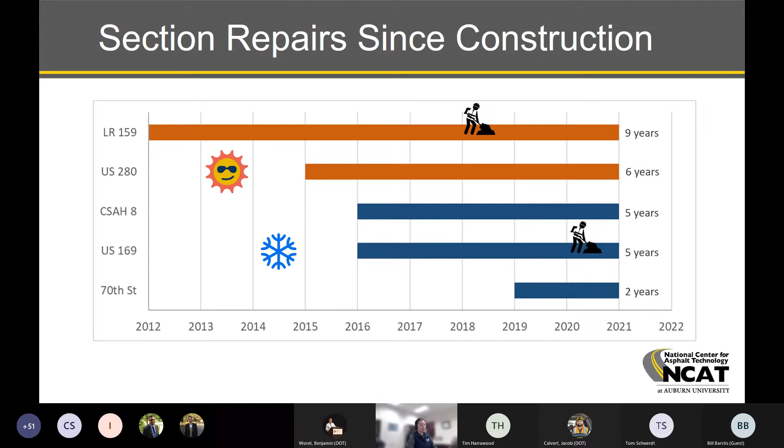And then last year we had to also do some work on some of the control sections in US 169. But other than that, we really haven't done anything. So that's important and speaks a lot as to how all of these treatments are performing, even for those that are 9 years old. Again, I feel like that's very significant.

Now, as far as where we are in terms of our performance indicators, I wanted to also show what percentage of sections are either in good, fair, or poor condition category. I kept the bars at the same length as the time that they've been in service, just to give you an idea, because maybe we'll see, for example, a lot of red in that top bar for LR 159, but it's also the longest bar, meaning that it's been in place for 9 years. So again, that gives us an idea of, okay, this is how the treatments are performing so far.

So one thing that I would like to point out here, for example, on LR 159, we still have that 4%, which I think is like one section that is in good condition category. And then roughly half of them are in fair condition category in terms of cracking, meaning 5 to 20% cracking. And we've had some that have gone over the threshold, more than 20% cracking. But again, 9 years. So this is the status right now. The US 280 sections, we do have some that have gone over 20% cracking, roughly 41% still in good condition, about half in fair condition category.

The CSAH 8 sections, again, it seems to be about the same story. The US 169, even though they have been in service for the same time as the CSAH 8 sections, we can see a lot more sections transitioning into that fair condition category, and then even some more with more cracking than 20%. We haven't had anything too significant for cracking for 70th Street, but those are the newer sections. Still, most of them in good condition category in terms of cracking.

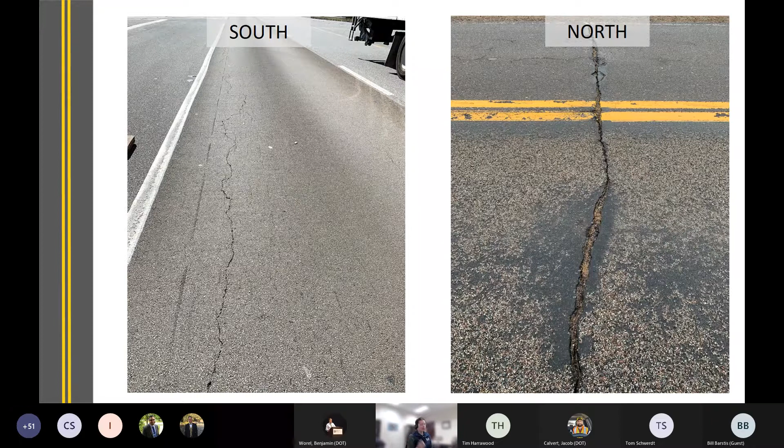Again, a lot of that cracking is a result of the existing condition of the pavement at the time of treatment. We can see there on the left, it didn't matter what type of treatment we had. We had either a cape seal or a chip seal. And if you can't see very well where the crack goes, I'll help you a little bit, but you can see it there along the wheel paths, no matter which treatment we had, it reflected back. Same thing, that's on US 280 in our southern sections.

And then for the northern sections, it's basically the same thing with the thermal cracks. And for example, in this case, we had the old shoulder that was kept in place, and we had a thermal crack or a transverse crack going there. And eventually that made its way also through the new thinlay. So again, there's cracking, but we need to look at the types of cracks and not just the amount of them.

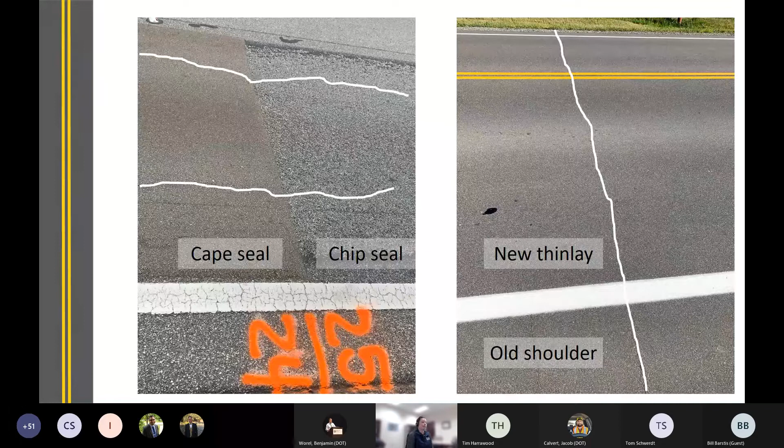For IRI, for the most part, I think we're doing well. It's not much of an issue for the southern sections. It's more of an issue for the northern climate. And we even have some sections in CSAH 8 where IRI has reached the poor condition threshold, more than 170 inches per mile, and a lot of them in the fair condition category. It's not the same case for the US 169. I think just the difference in the construction and the pavement structure that's there is making all the difference. And 70th Street, even though it's recent, we have about a quarter of them that are already transitioning to the fair condition category.

Why is that? Well, these are the types of cracks that we see. This was taken in CSAH 8, so you can see the difference in elevation, the effect that that could have in the IRI. So it's no surprise that we see those numbers where we see them. And what's important is to see that pavement preservation treatments can help mitigate some of what's happening there.

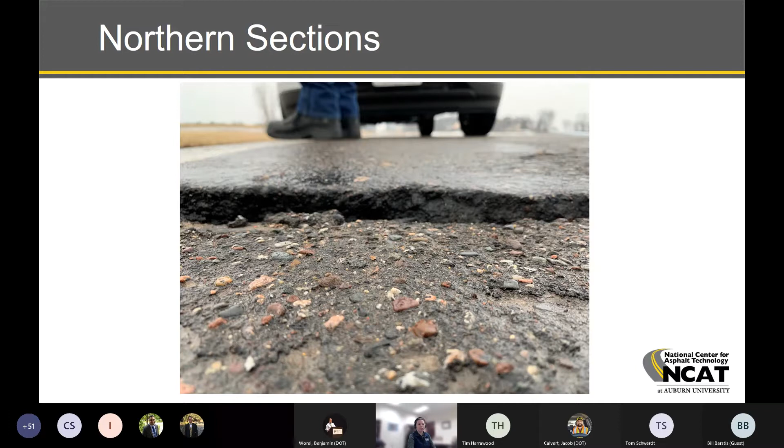Now, rutting is not really an issue for any of the sections. Some of them are just barely over the threshold for the fair condition category, so they may be 5, 6, 7 millimeters of rutting, but really not an issue for the most part, and that's not surprising, I think.

One thing that I wanted to talk about today is our efforts to put this data in a way that it's more accessible and easier for people to use. I showed a preview during the test track conference, something that we were working on to make it a little more interactive. The way it was set up is that you could go down the list and click on the different treatments, and then that takes you to a PDF file. You want to see another one, you got to get out and look at another one, and so on. So we tried to make it more user-friendly.

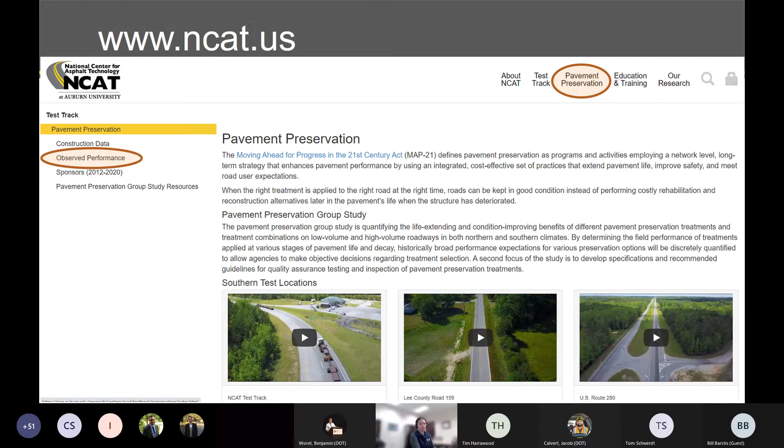But if you click on that, and before we go there, I need to make a really strong point here that these results are preliminary. They may be changing as we get the data, we are adjusting. So don't take this as being written in stone or anything like that. But moving on, you will find something like this. So it's basically a summary, same type of information that we had before, just easier to use.

Just to give you an idea, and I could have done this with the live page. This is live right now, but I wanted to go one by one. These boxes here at the top left are just filters that you can use. So you just choose the treatment that you want to look at, what kind of initial condition you want to look at, and then the time frame.

We've extended our analyses for cracking up to 10 years. So those curves that you see there for cracking, we fitted that using the data and extrapolated to 10 years just to have a nice round number. So you can choose those just to look at what you're really interested in. Otherwise, you just get the whole cloud of data.

These numbers here at the top, if you look at the time to poor, that's just the time that it took to get to the 20% threshold that will put you in the poor condition category. So in this case, this is the control curve. We can see there 4.5 years until we reach that threshold. And then the time to poor for the treatment, in this case, we didn't get there in the 10-year period, so it's not showing anything.

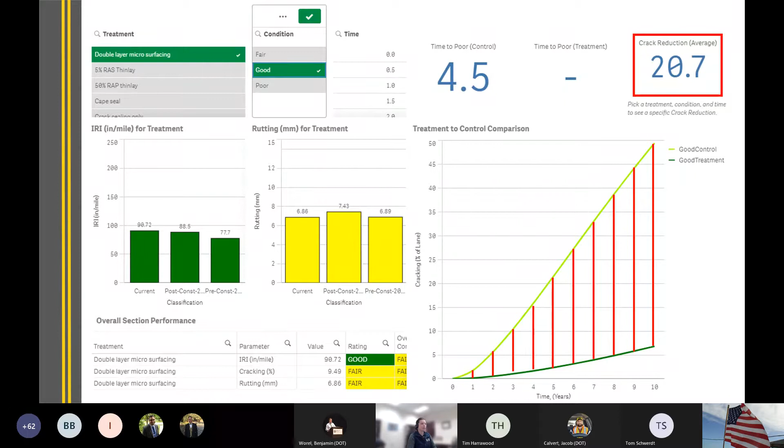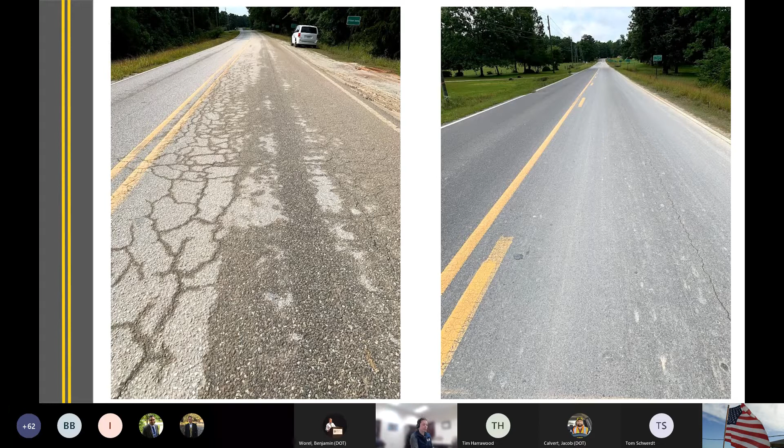And just an example here. So this is what you will see as far as the data. In this case, I selected a double layer microsurfacing that was in good condition to begin with. But this is really what that looks like in the field. So big difference, especially in cracking, which was reflected in those charts. This just gives you the picture of where we are right now, but it's nice to have the data to support all of that, not just the visual observations.

Another thing that I wanted to point out is that we have written several journal conference papers. We have a report there. So if you go to the Pavement Preservation Group Study Resources at the bottom of that menu on the left, this is where you'll find all of the published resources and links to those papers if you want to read them, visit them. There's the reference for them.

Now, another thing that I wanted to talk about was how preservation is affecting IRI. We have done a lot of discussion on crack performance, and we really can do the same thing with any other indicator. So we've done an analysis for IRI, again, because it's very relevant to the northern sections. And this is part of an upcoming TRB paper that will be going out for the next meeting.

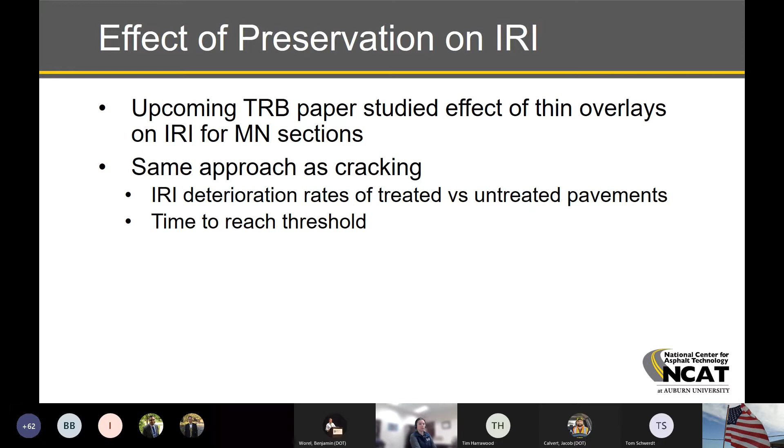So just wanted to show a preview here, but it's basically the same approach as what we have done for cracking. We've looked at the IRI deterioration rates of treated versus untreated pavements and compared that, the time that it takes for them to reach a certain threshold, and do basically the same type of comparison and analysis that we have done in the past for cracking for the treatments.

So how we did this, we basically took the control sections, first of all, looked at where those control sections were at the beginning of the study, and divided them by condition category and developed a curve for those sections so we could get the slope, basically deterioration rate, based on that pretreatment condition.

So this is an example here for the CSAH 8 sections. We had sections in good and fair condition category. We didn't have anything in poor condition category at the beginning of the study. And it doesn't change too much, but the slope is slightly higher for the sections that were in fair condition category prior to the beginning of the study.

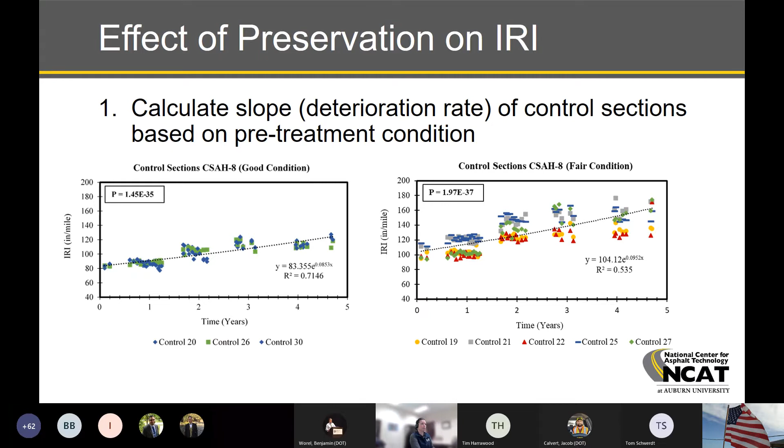Then we did the same thing for the treated section. So we took each of the treatments, in this case the thin overlays, and we calculated the slope. We fitted the curve. It's an exponential form. We calculated the slope for all of them. You can see there's a pretty decent fit for most of them. High R square, over 0.8 for most of them. There's only one that's about 0.6.

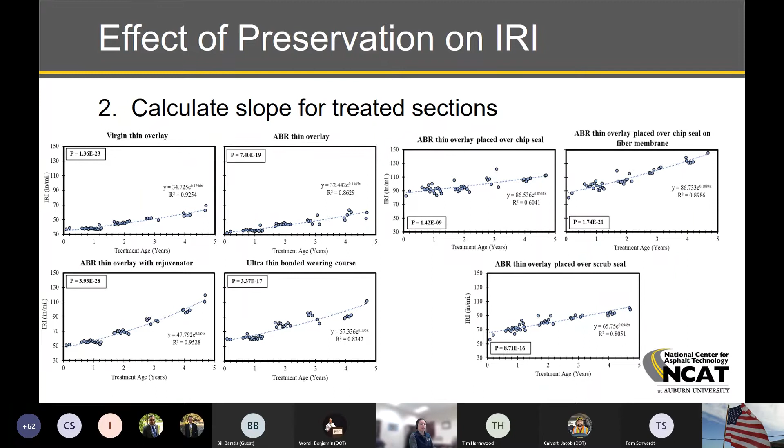But we took those, and now the next step is to compare the two. One thing that we had to do was shift the untreated curve. We know the slope is basically the same, but we had to change the starting point at time 0 so that it will match the pre-treatment IRI of the treated section. So in this case, for example, this section was treated with a virgin thin overlay. Before that, the IRI was around 86 or something like that. So that's where the untreated curve starts.

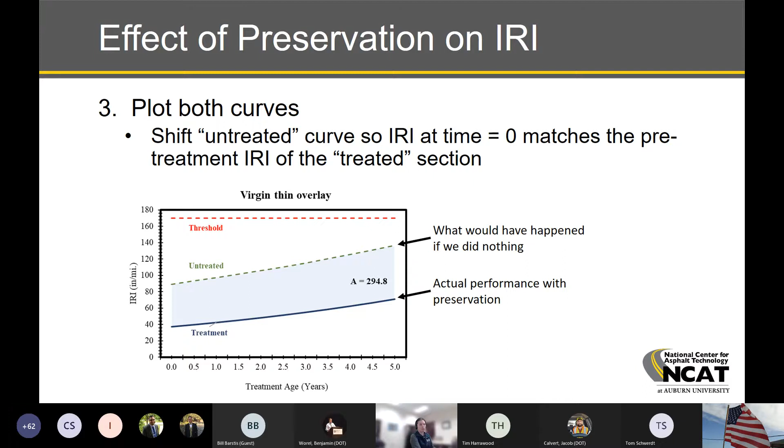And then we just plot both of them. So you can see there, the dashed green curve is what would have happened if we had done nothing. And then the bottom solid curve is the actual performance of that section with preservation. So definitely a big difference that it made. And this is in CSAH 8. So even though we had those aggressive thermal cracks, we've been able to keep a fairly decent performance by applying a pavement preservation treatment, which we wouldn't have if we hadn't done anything.

So the next step will be to estimate the time that it takes for those sections to reach the poor condition category, which in this case is 170 inches per mile. The life extending benefit is the difference between the 2 points for treated or untreated. And in this case, I'm showing here again, CSAH 8 sections.

We can see that on average for all the treatments that will fall under the thin overlay category, we're adding about 5.4 years of life extension in terms of IRI, and standard deviation 1.7. We can see in general we get a little more if we're doing a combination. So if we're placing the thin overlay on top of a chip seal, or a variation of a chip seal, could be the regular chip seal or fiber membrane or scrub seal, we tend to get a little bit more out of it. But in general, we're adding a good amount of time to these sections in terms of roughness.

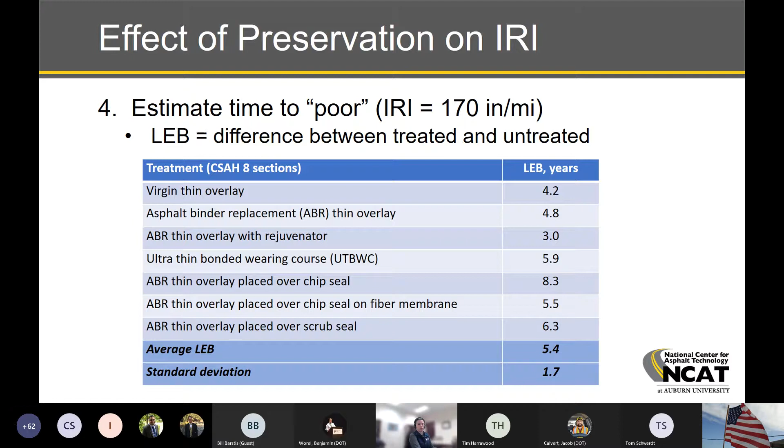So that's important. We see that consistently, and that can give us a better idea of how to plan for the future, how to put this in our pavement management system, and make better decisions as to what treatments to use. Now, getting to that poor threshold, we had to extrapolate far into the future. So right now we're at 5 years of service. For some of these sections, maybe that meant going all the way to year 10 or 11. So there's some uncertainty there. As we get more data, we can refine those numbers.

For US 169, for example, we couldn't get a good prediction, didn't feel confident predicting into the future. If you can see there that example of the virgin thin overlay on US 169, the treatment is almost a horizontal line. So it would just take too long to get to that threshold. But I don't expect that trend to hold forever. We'll probably keep getting more data and more deterioration, and at some point it will accelerate. So I feel like we need to be cautious also when we look at that.

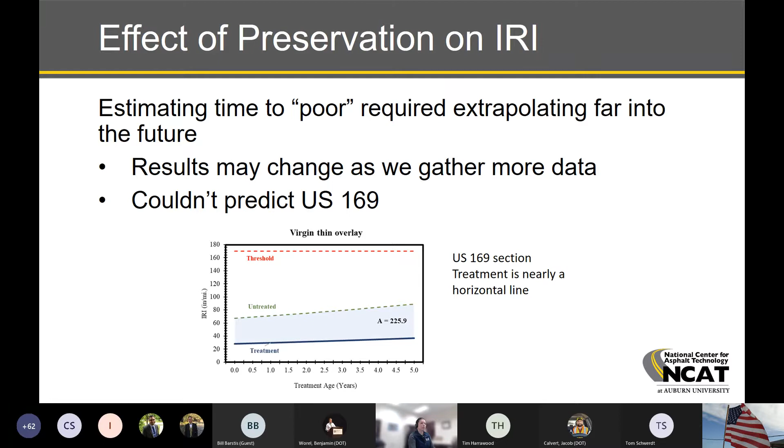But I think what's important here is to see the difference that it makes to have a treated pavement versus no preservation, and how effective it can be, and how much it can help us improve the condition of the pavement. It's also important to note, for example, the performance jump that will be the immediate improvement that we observed in terms of IRI. It was higher for sections that were rougher to begin with, and that makes sense because if they had higher IRI, that means there's more room for improvement by doing some treatment. If the section's already good, there's not much farther to go there. So that does make sense.

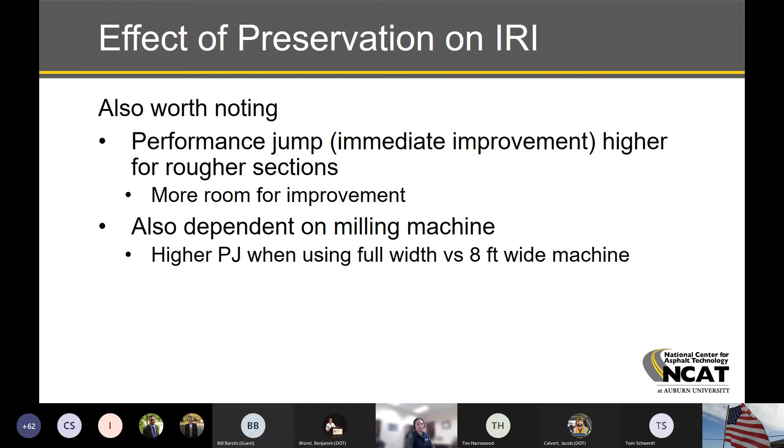And it was also dependent on the milling machine that we used. In the case of Minnesota, we had a full width milling machine and an 8-foot wide milling machine. So we were seeing that consistently better improvement when we used the full width machine. So something to note there. Also, we see that the life extending benefit is higher for sections with lower pretreatment IRI. So it's also the importance of how this plays into treatment selection and timing of when we do the treatments.

So there's more immediate improvement if you have a rougher pavement, but it may not give you as much life extending benefit. So you have to target the pavement just right so you get the better benefit out of it. This is again very rough right now, but it does give us a pretty decent idea where that trend is going. If your pavement is too rough, you do get some benefit. You do get some life extension, but it may not be as much as if you do your treatment a little earlier in the life when you're starting to see the deterioration, but you're not to the point where it's almost in that poor condition threshold.

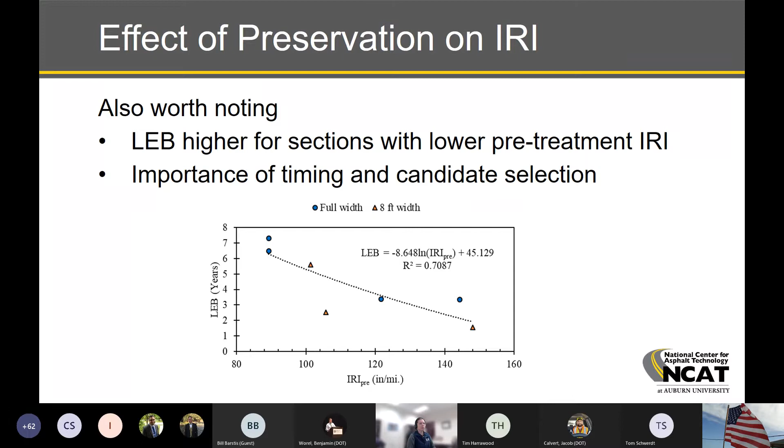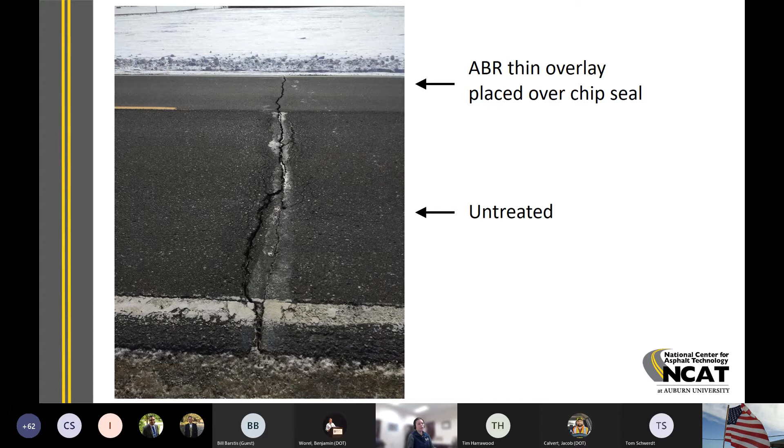The other section in the far side of the screen had a thin overlay placed over a chip seal. So we do see the thermal crack also. It's very hard to stop that, but the condition of that crack is definitely different from the do nothing scenario. So again, helps a lot and important to keep that in mind.

So to wrap up here, I feel like treatments continue to be effective. If our threshold is the poor condition categories, then we have a lot of sections that are still far from that target. So we have a lot to learn coming up. And then it's evident that we have benefits, and as we keep collecting the data and analyzing, it's becoming easier for us to quantify those benefits based on the relevant parameter, be it cracking or IRI or anything else that we would like to look at.

So this is where we are right now. We keep working, analyzing, collecting. That's basically our cycle. And I think that's all I have for now.

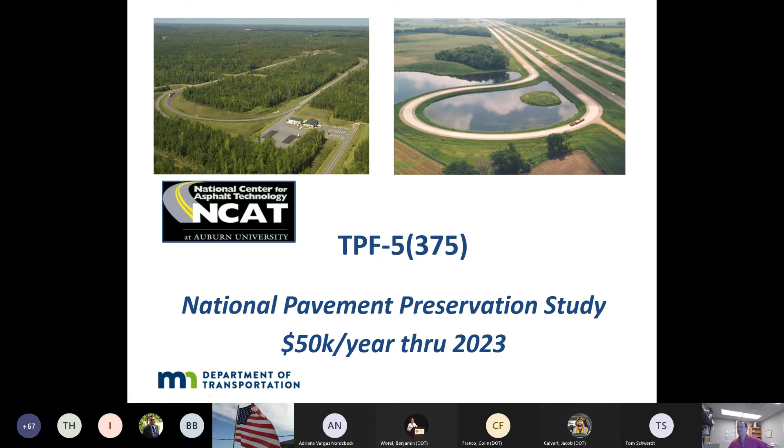So especially for the new members, this is a transportation pooled fund. There's our number. This costs $50,000 per year. And also to point out that we are the NCAT MnROAD partnership. The preservation work is really not on our test tracks, but off-site. So here in Minnesota, our office is down at Maplewood, Minnesota in the Twin Cities, MnROAD's about 45 minutes away, and our test section up in Pease, Minnesota is about 45 minutes up from MnROAD.

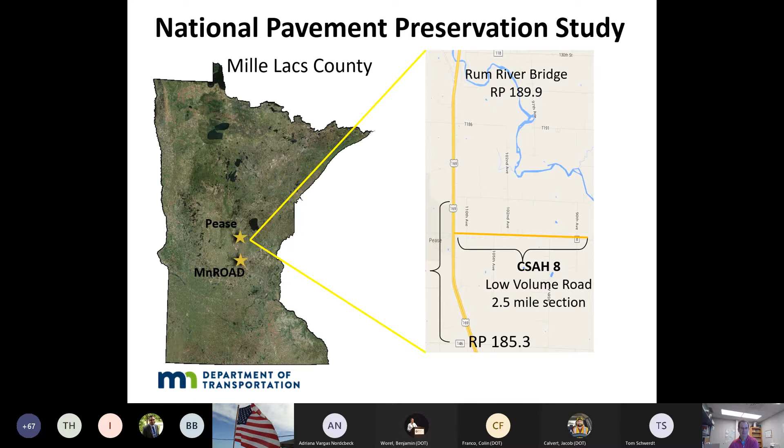Just a general layout here. This is US 169, which is our high volume route. CSAH 8 right there, so County State Aid Highway 8 is the low volume section, 2.5 miles long. So we were fortunate to get, I think, two different and interesting test sections in one spot. Not really to read because it's pretty small font, but more the general layout on 169. Our sections are in the northbound driving lane. Here, most of the surface treatments are at the start. We get into some controls, some fog seals, and then our thin overlays at the northern end of the section.

On the County State Aid 8 Highway, similar layout of the test sections. What worked out well here down at the east end is that wherever we did a thin lay, so we did these milling and thin lay surfaces, we really have a control across on the other side. So it was easy to observe the thermal cracking or reflective cracking performance there.

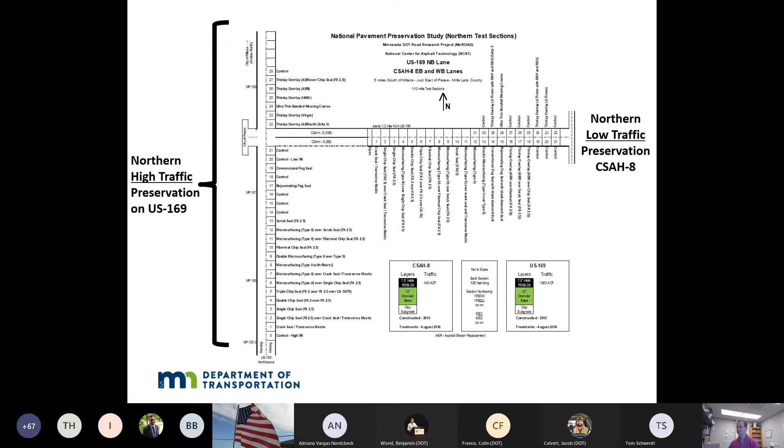So on the MnDOT pavement preservation website, we've got history and test section information. That's the north-south, and now the 70th Street Recycling Project, which is really turning out interesting. Got some field reviews. One of our staff here has done a lot of work on annual visual distress maps, so that information is available. I think we've got the link to the NCAT papers Adriana mentioned, and then our construction application data. So as you look at cells, if you want to know any application rate, that information is also posted online.

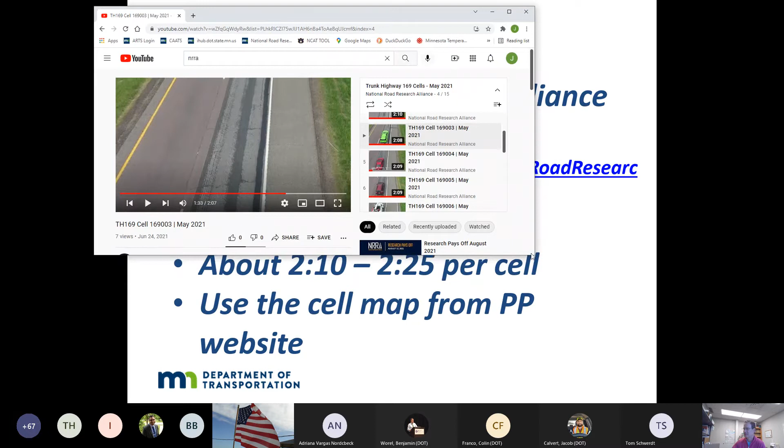The other thing we've recently done, and for the first time this spring, our aeronautics unit was out, and they did a flyby of all the cells. I'm going to show you a quick demo of that, but it is on the NRRA YouTube channel. Got a link here. They're going to do this once a year, so they took these pictures we're going to look at in May of this year. Each cell's about two minutes, just a little over 2 minutes, and you can use the map I showed you just a few slides earlier. It will tell you what the different sections are. I think in the future we'll get these labeled with a little more detail in our first run through here.

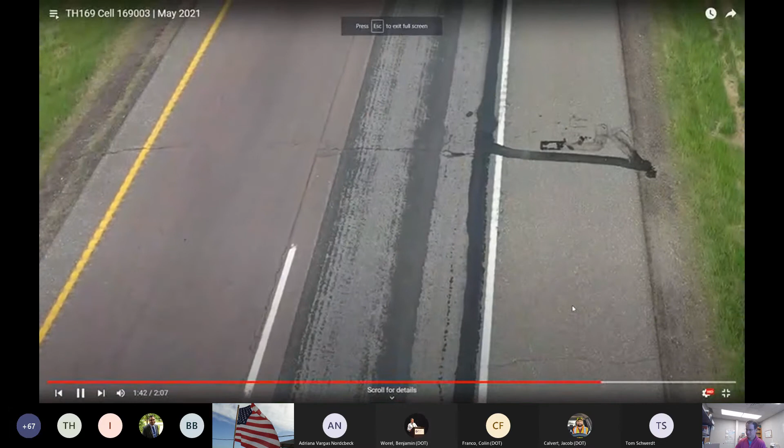Now we're on to the double chip seal. You can see we've had a lot less snowplow damage, especially in between the wheel paths. In the wheel paths, you do see a little, I don't think I'd call it bleeding or flushing, but it's a little richer in there. It hasn't impacted our friction numbers yet. You can see how we've got some of the bigger thermal cracks here that come off the shoulder into our lane there.

So this is the double chip seal, and these are available for every cell that we've had on here. I think if you start this at the first cell, you can continue to go through the first 15, but then you'd have to search and look at all the other cells. So that's one of the newer features we have going, and I think it's really good to have that visual of what the performance looks like.

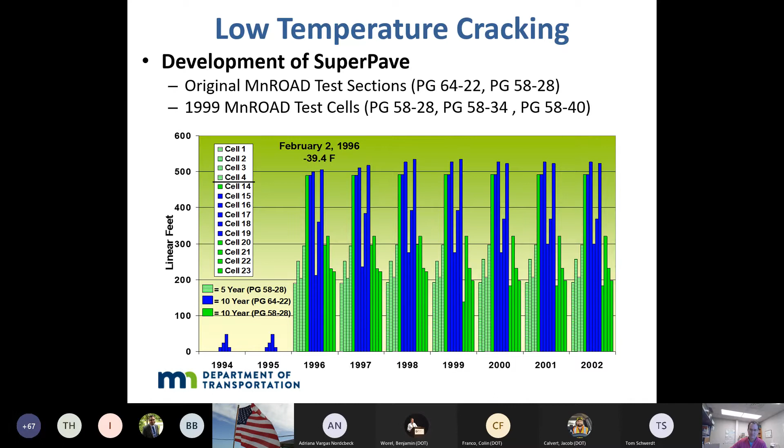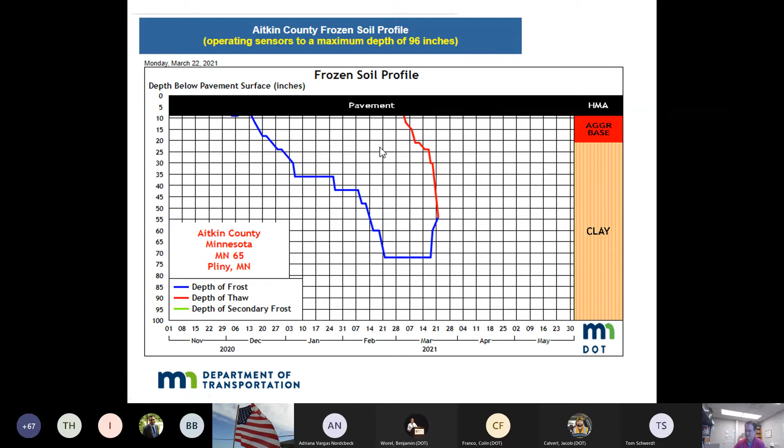It's still very cold on the surface, but we've got this thawing going on underneath, and until we completely thaw out and the water can drain out of the system, this pavement's really in its probably weakest state for at least two weeks of the year. And then also we've got some clay underneath here, which we know doesn't drain very well. So winter is really tough on these pavements.

And then to get into some of the study and the benefits here, what I enjoy about working on this project for the last really 5 years, since our partnership and construction in 2016 of our northern sections, is to improve and or extend the pavement life and really do it in a cost-effective manner. We're really getting some great data, after 9 years in the south and 5 years in the northern area, on this improvement and life extension.

Cost effectiveness is going to be a little more dependent on every agency's different costs, and then to kind of compare those costs against different treatments and determine what can be cost effective for your agency.

Pre-treatment condition on 169. There weren't as many thermal cracks. We saw a couple in the video flyover. This pavement had more little block cracking. You can see it in here. There's kind of a thermal crack, but not very well defined. A core taken out a couple feet away from that crack came out in pretty good condition. So we had some good pavement structure there.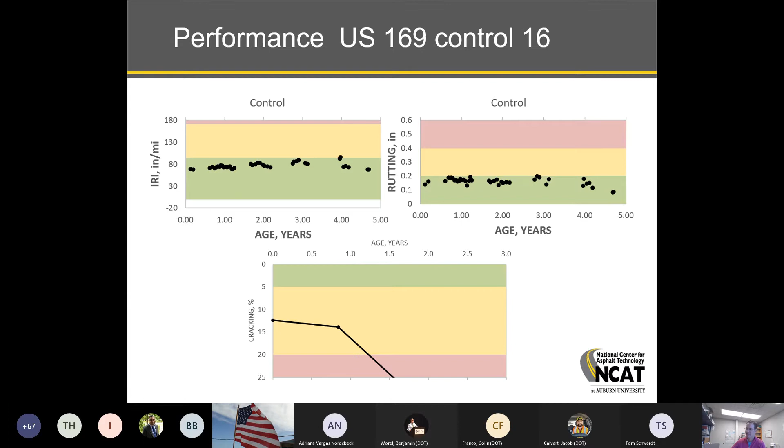Rutting really was never a problem, but what you can see is that the percent cracking was really going up. So percent cracking was really controlling what the district operations people saw in determining that it's really time to treat this pavement, and that's why we put the microsurfacing on it.

So now to get into a summary of some of the treatments. So microsurfacing on 169, you can see when we started, all the sections were in the 70 to 80 inches. After a good treatment, we improved the ride, and here is every winter. From fall to winter, we always go up in roughness. It's bouncing around a lot there, but from spring to fall, pavements kind of settle down, and we're typically getting smoother.

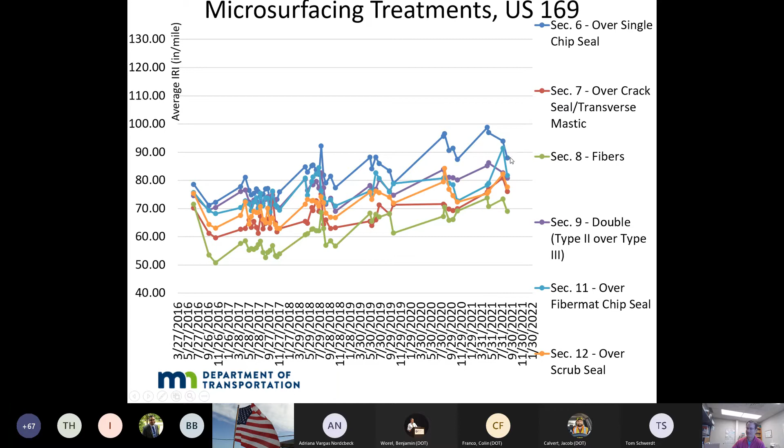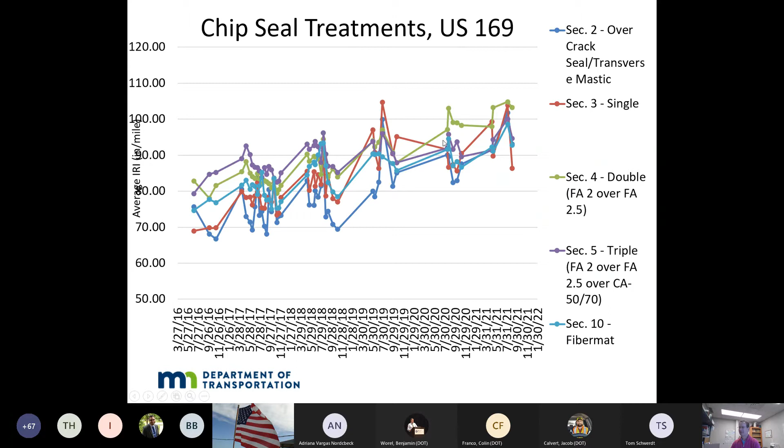So now we're in the about 70 to high 80s here, so not a big increase in ride on these sections. Chip seals, not all of them had initial improvement in ride. My experience with chip seals is not big ride improvements. It's always going to depend on the pavement, but here the life extending benefit can be the big improvement, the big cost effectiveness. Rides from 70 to mid 80s, now mid 80s to 105. So really the first chip seals moving into the fair condition. And once again, getting much rougher during the winter and smoother from spring to fall.

Finally, Adriana mentioned the two different milling machines. So on 169, where we did 6 treatments, they were done with the full width milling machine. We got outstanding initial ride. Numbers of 30 inches per mile are just fantastic. Really anything under 60 is very good. So these pavements were in

very good, good condition. And I'd even say most DOTs are probably not looking to do a thin mill and fill at this IRI number, but you can see we got outstanding results. And even today, 5 years later, we're still in the 40s and one still in the 30s. That's just fantastic performance, which then turns into cost-effective life extension.

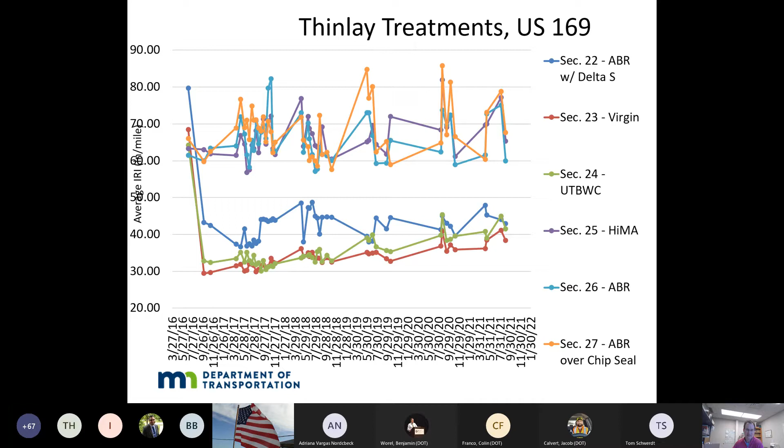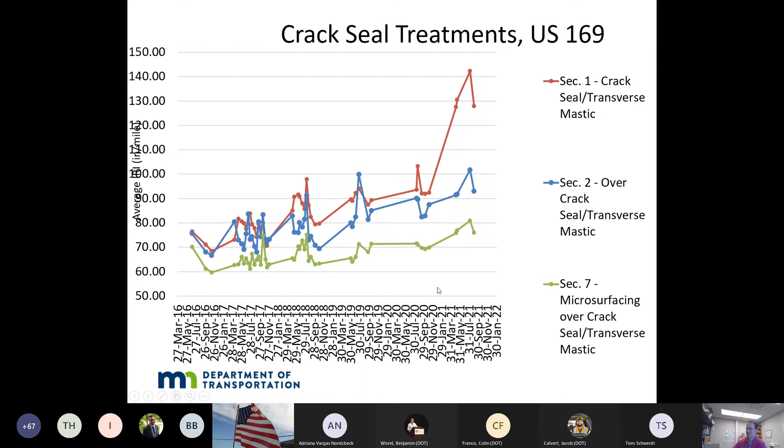Crack seal treatments, 169. I think our first section here had quite a big jump in roughness. Everything did improve, but there's our crack seal numbers. And some of these were covered with, let's see, I think two, we have crack seal under the chip seal here. And here's microsurfacing on top of the crack sealing, which is the smoothest of these three crack treated sections.

And for the pre-treatment condition on the county road, not the kind of squirrely cracking we had on US 169, but every section, 1/10 of a mile here, had 5 to 7, I'd call them classic thermal cracks, where the pavement was cracked across the lane. And that was really the challenge with treating these sections, is maintaining the thermal cracks. Microsurfacing, on some of them, especially the rougher ones, can tend to flow into those thermal cracks a little better.

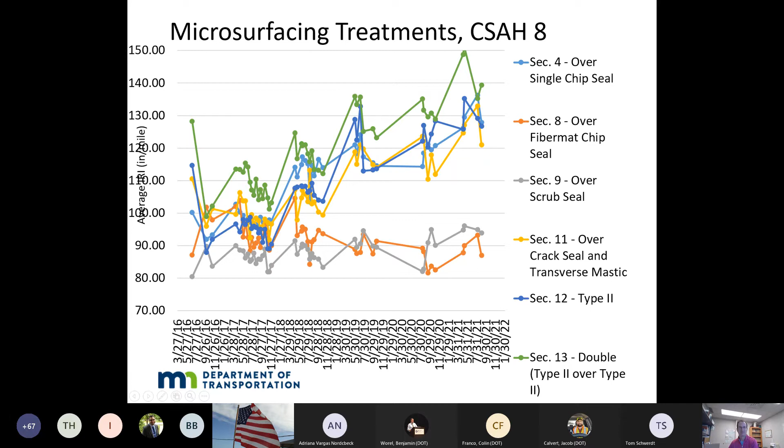You can see the double micro, the green line, made a really nice improvement. So two passes filling in those transverse thermal cracks, and then just continuing to get a little rougher. We've still got a couple that haven't changed much. But once again, every pavement, every surface is a little different, so performance always varies and depends on the individual section.

Chip seal sections, similar story, getting rough in the winter, smoother in the summer. We've gone from really one fairly rough section, which is about back to its precondition IRI values, to now all of the chip seal treatments are in the fair IRI condition over here.

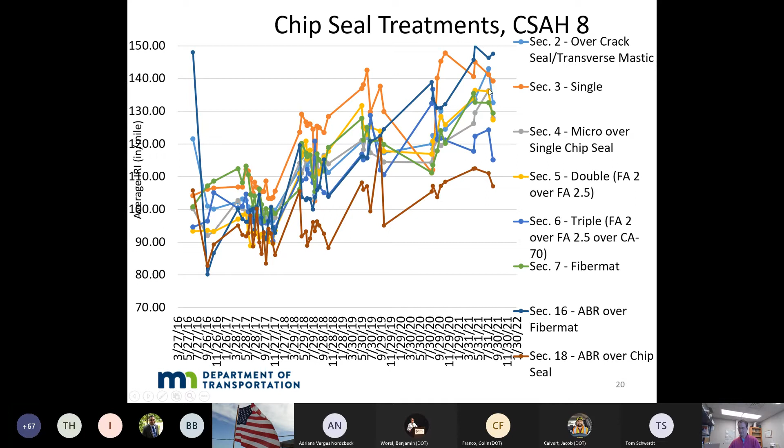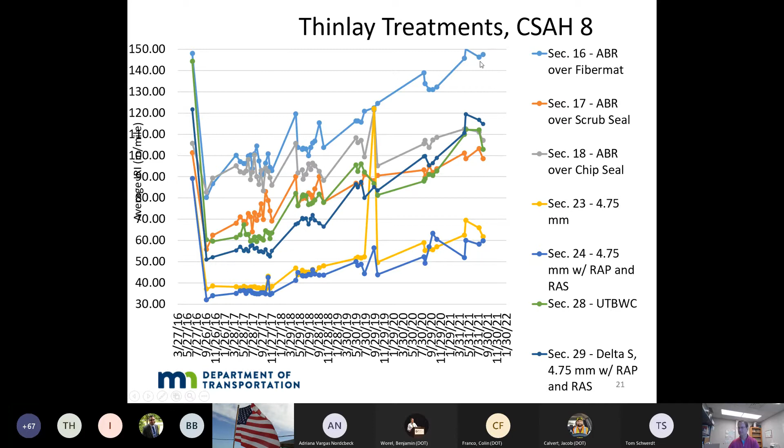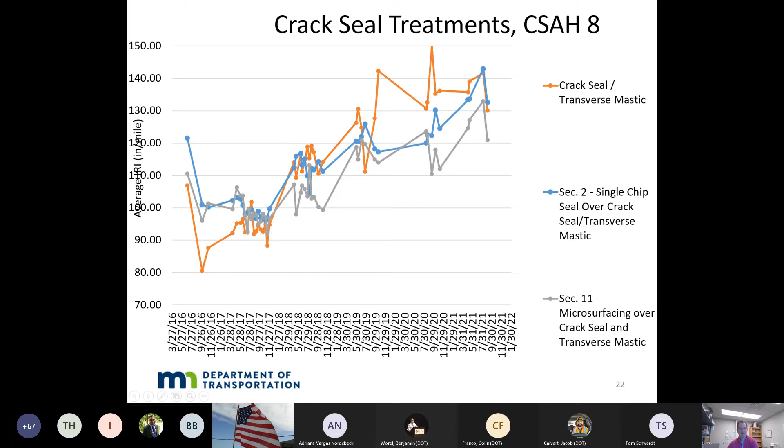Here's a couple of the recent pictures. So single chip seal shot at 0.34 gallon per square yard. This single chip had the most snowplow damage. You can see that we scraped the chip seal kind of off that longitudinal shoulder joint. Because we had a rumble stripe here, where you grind the rumble strip and then paint it to become a rumble stripe, I think as part of that, they moved the shoulder travel lane joint inside into the travel lane, and we get that deterioration there.

So the district maintenance forces did the maintenance on that, which shouldn't be impacting our ride IRI numbers because we'd be over here in the wheel path. But you can see that the chip seal with fiber mat, we did shoot it a little heavier, so we have two variables. We have a higher shot rate of emulsion and the fibers in there, and we certainly maintained the condition of that chip seal much better than the single.

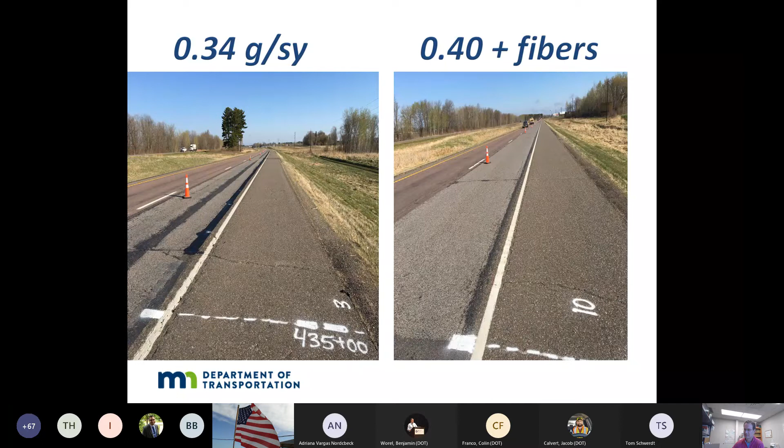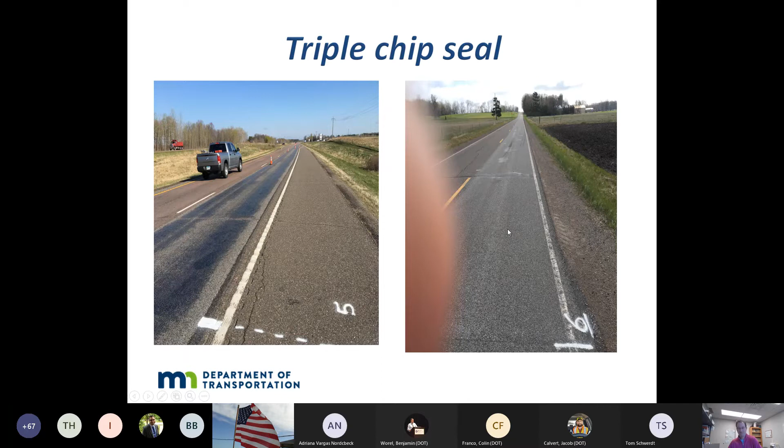Here's the triple chip seal, both low volume and high volume. I think from a pavement protection standpoint, we have about a gallon per square yard of emulsion down on these. The triple chip on the high volume got a little more flushing, bleeding going on. The triple chip on the low volume, except for the thermal crack problems, which are once again really tough to treat, I think that triple chip seal on the low volume pavement is going to last a very long time.

Another observation, the Cape seal seems to be very tough. We've only done a couple on the Minnesota state highway. I can think of, we've got some test sections out there. But sometimes our chip seals seem to get a little plow damage, and I've seen microsurfacing wear down to the underlying pavement surface, the hot mix that was there.

But when you do a Cape and combine the chip seal followed by the microsurfacing, you really get a tough surface. If you tend to wear off the microsurfacing, when it gets to the top of the chip, the wearing stops and you get a long lasting surface treatment.

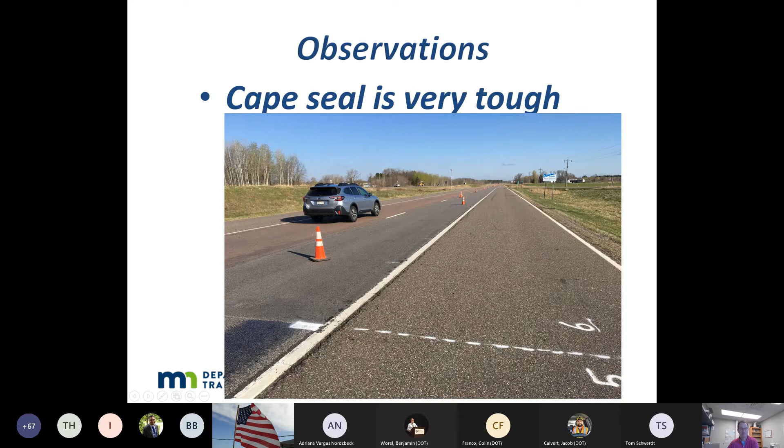And from the early findings down at NCAT and things that we're seeing now, any crack fill prior to surface treatment, I think, is going to certainly provide longer life extending benefits and better performance on those pavements. Our control sections are really starting to fail now, a little more than any of the treated sections.

Roughness, I mentioned a few times, increasing from fall to spring and improving spring to fall. And for the county system, it's really those well-defined transverse thermal cracks, which I think are going to impact performance and ride. And on our US highway, some surface cracking issue.

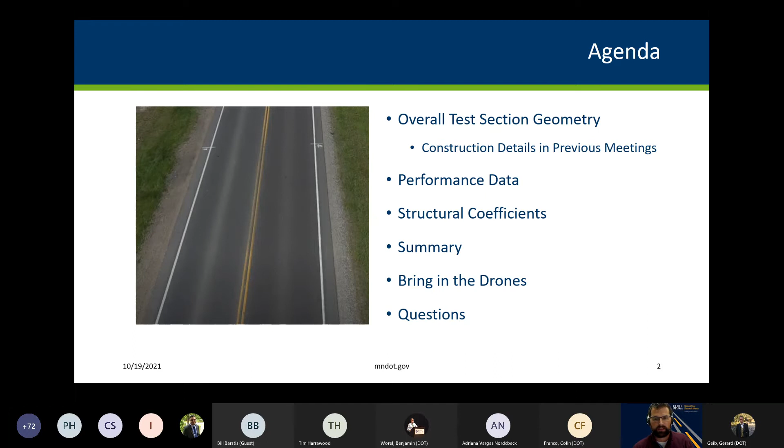I will mention the structural coefficient work that Adriana and Tauhid are calculating at NCAT. I'll give an overall summary of what I've presented and follow with a teaser for the MnDOT aeronautics work at MnROAD, which it looks like Jerry has beaten me to the punch on. But we'll continue to cover that again, and time will be left at the end to answer any questions that you might have.

As well as being a collaboration between MnROAD and NCAT, these sections are also a collaboration between MnROAD and the cities of Otsego and Albertville. The north half, westbound 70th Street, is owned by Otsego, while the south side, the eastbound lane, belongs to Albertville. There's Otsego's water tower and the Albertville malls for context.

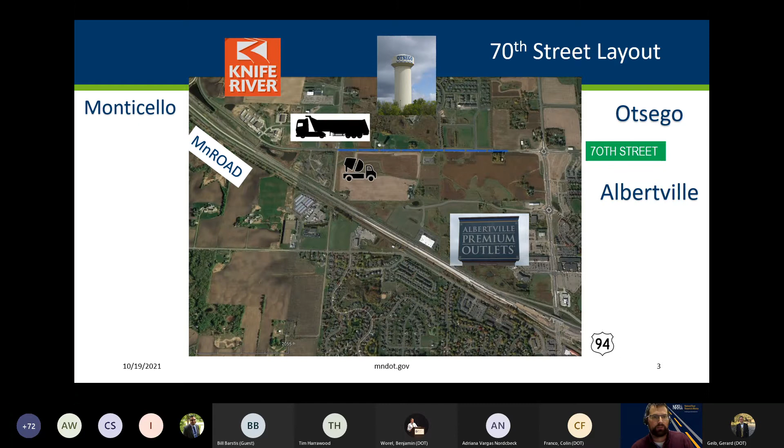Commercial traffic consisted mostly of deliveries to the local Knife River plant, as well as the Trudell Trailers, which is located right next to the concrete plant. And the majority of the residential traffic came from the developments on the northeast side. 70th Street also serves as a side road to connect Albertville and the nearby city of Monticello. Most of the visitors to MnROAD will have traveled across 70th Street and may remember its previous condition. I've been told it's hard to forget.

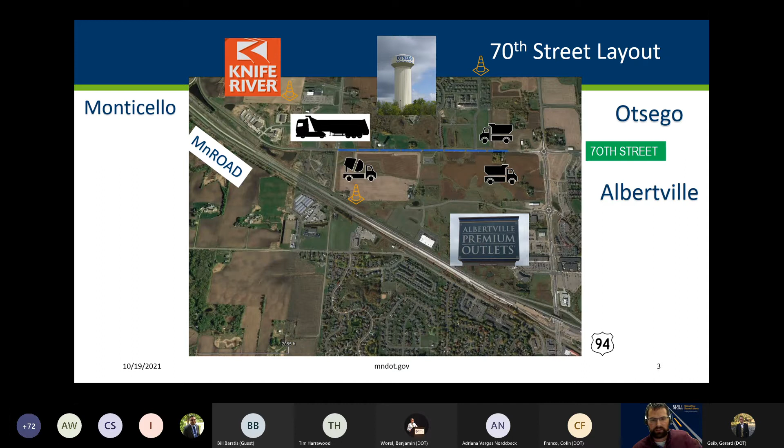There we go. And one thing we did not anticipate through the last couple of years is the amount of construction traffic that would increase with the expansion of the housing development to the north, the addition of a Michaels facility next to Knife River, and the beginning of another large project to the south of 70th Street that we're not certain what that will be yet.

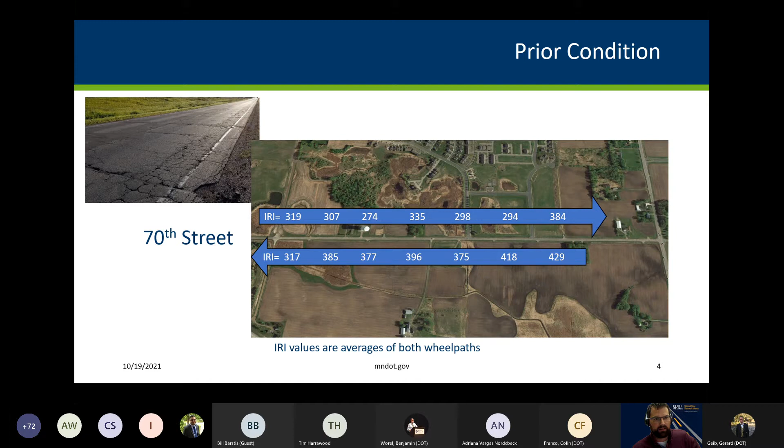70th Street was due for repairs with deteriorating road surfaces and low ride quality. Michael Vrtis likes to joke about how the cracks could be seen from space, and the ride quality was so poor, he was afraid our inspection van would fall apart when we had to run high-speed data collections. These factors, along with its scheduled replacement within the next 5 years, made it an excellent candidate for inclusion in the road preservation study. And here I've highlighted some of the IRI numbers pre-treatment.

And you may have noticed from that how the condition of the south side of the road varied from the north side. Albertville had only a few residents on the south side and had a lower concern about the condition of the road than the more populated north side. This can be seen in the visual distress of the roadway and is reflected in the measured roughness index. You can see where more treatments had been applied to the north side and the south side had kind of been left to do its own thing. It was therefore determined that the deeper treatments should be placed on the south side eastbound lane to get the most benefit.

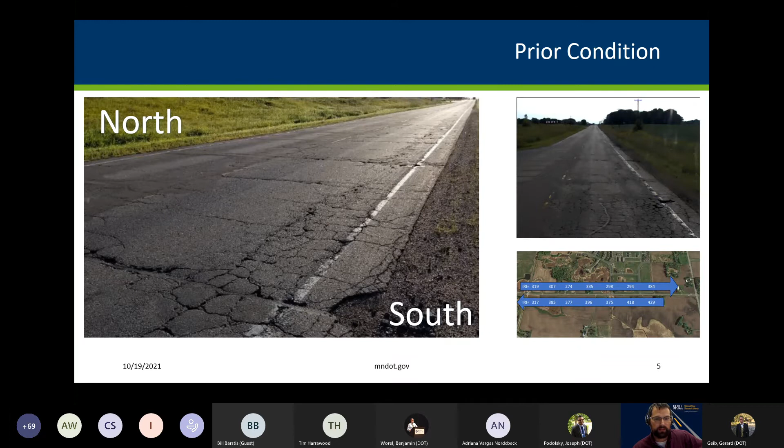So this portion of the pavement preservation recycling study consisted of 500-foot treatment sections that were constructed on the same road. We're going ahead, sorry about that. 50-foot transition sections were added between cells and room was left for lead-in length for the inspection van.

The main treatments consisted of a 1-inch thin lay over 7 inches of full depth reclamation, where stabilization was performed by foam and emulsion methods; 1-inch thin lay over 3-inch cold in-place recycling, again using both foam and emulsion; 1-inch thin lay over 3 inches of cold central plant recycling, again using both foam and emulsion. The control for these sections consisted of 1-inch thin lay over the existing pavement, with further controls being added with a 1-inch thin lay over a deeper 2-inch and 3-inch mill and overlay.

Sorry, my slides are getting ahead of me. Buzz and Adriana from NCAT led construction efforts with a crew from East Alabama Paving traveling from Alabama, and the Wirtgen demo team providing a CCPR plant and recycling equipment.

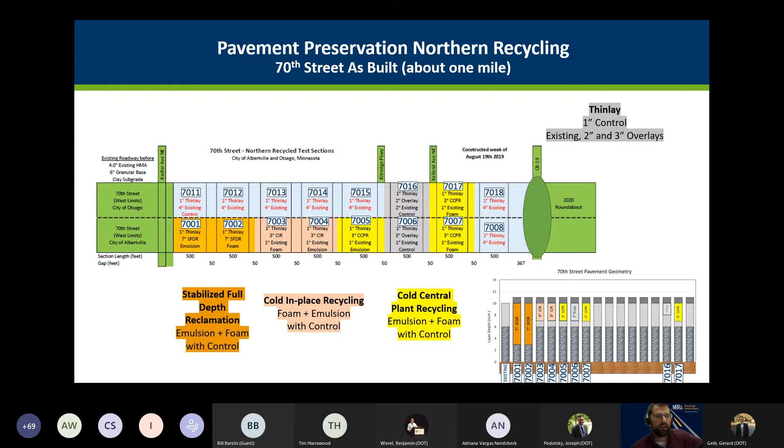And here we can see the different treatment depths compared to the existing roadway on the left side of the graph. The existing roadway consisted of 4 inches of HMA over a 6-inch granular base over a clay subgrade. To this, we had 2 deeper treatments of the 7-inch stabilized full depth reclamation, and then our 3-inch treatments of CIR, CCPR, and overlay. Westbound received one 3-inch CCPR treatment and a 2-inch overlay. All of the sections received the same 1-inch thin lay of high quality asphalt designed by NCAT.

This thin lay control is not the normal treatment for roadways in this condition, but it was decided to be used as the minimum treatment to get these sections through the next couple of years. So it was planned for short term. We said this is the shortest we can kind of get it through with the least amount of effort.

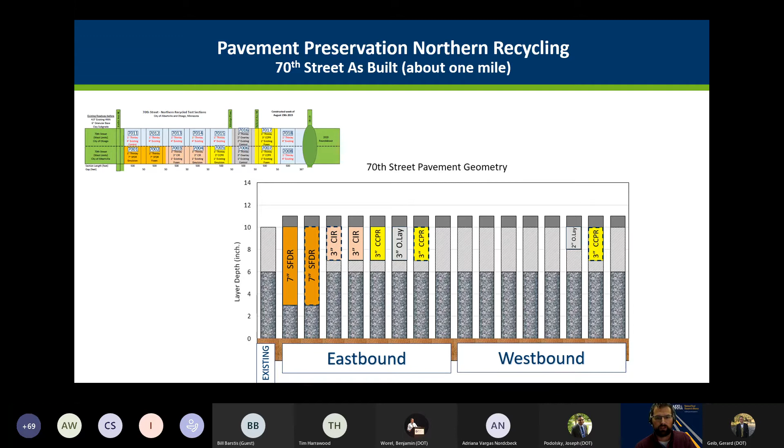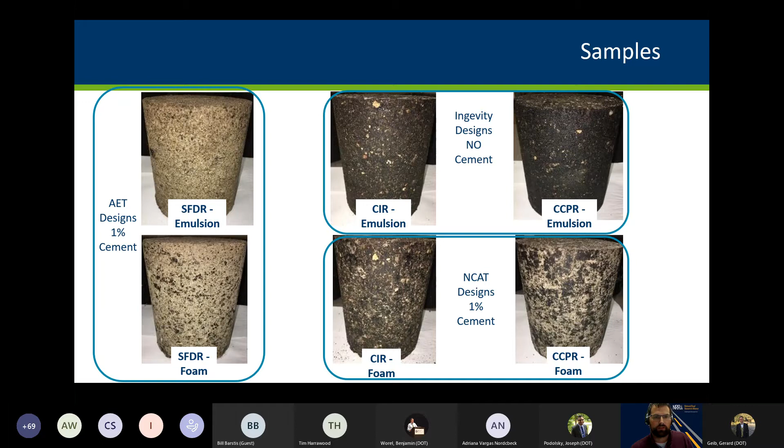And during construction, material was sampled during placement, and Ben Bauer was able to create cores in NCAT's on-site trailer. These photos show cores from the different treatments and are displayed here to show the visual differences in the mixes and to note the different designs that were provided. Actual mix designs are discussed in previous presentations. And I've included this slide mainly because Michael really likes it, and I hope you agree. I think it's fun to see all of the material differences. But if you do have questions, Michael and Adriana are available afterwards for any mix design questions.

All right, over the last year, manual distress surveys have been performed in October, January, and August. Cracking lengths were collected manually at these times. And as discussed previously, reflective cracking appears to be the main form of distress. What's new this year is that transverse cracks have now appeared in all sections, with the control sections still showing the most cracking. Rutting still appears to be low, and so has only been measured by our high-speed automated pavement distress inspection van. And as Adriana mentioned in the previous presentation, no repairs were required this year.

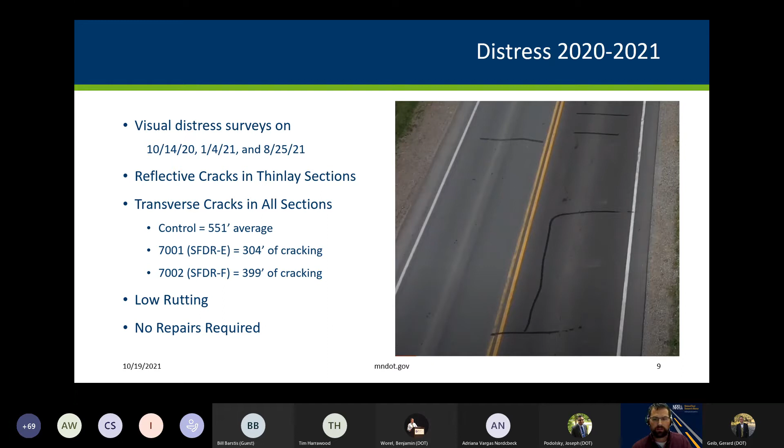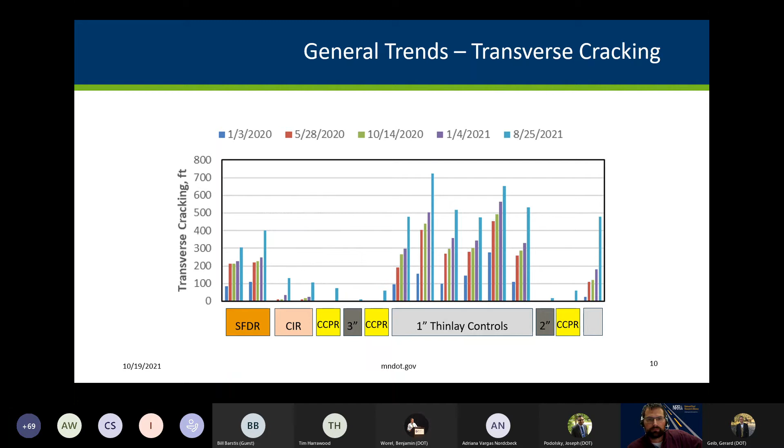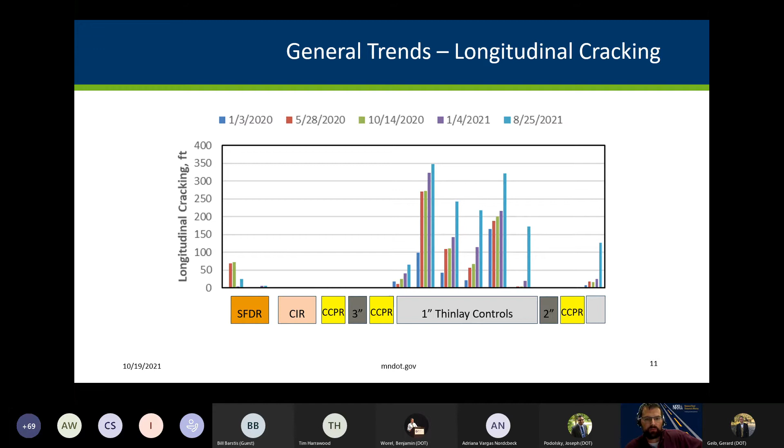Longitudinal cracking lengths show similar trends, with the Thinlay controls showing the bulk of the cracking. Stabilized sections show minimal cracking, and the rest of the treated sections have yet to display longitudinal cracks. Ride data collected from our high-speed automated pavement distress inspection van showed similar results for all sections. Here you can see the total average of the last 3 collections. The general trend appears to show the right wheel path having larger ride measurements.

One of the factors that may be contributing to these higher wheel path measurements was the test construction method, previously touched on by Adriana. The test sections were constructed full lane width, but the shoulders were left in place. These existing shoulders may not have provided ample containment force during construction, and the existing distresses may be serving as propagation points for the reintroduction of distress into the new treatments.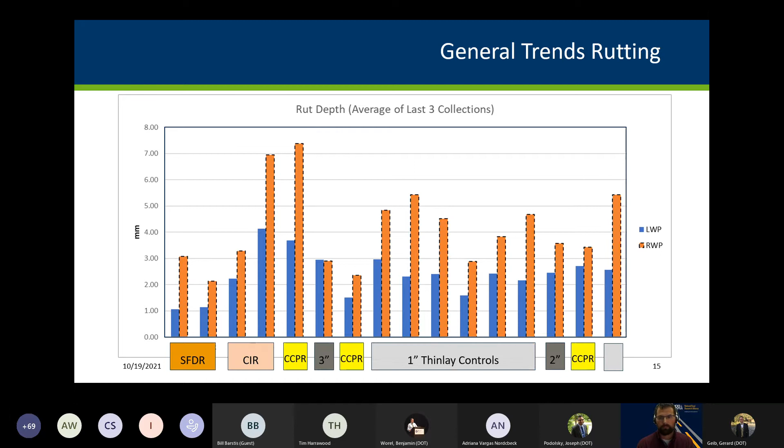And this can be more clearly seen for context with the pre-construction measurements included in these graphs as a way of re-illustrating the point that the measurements remain low. Ride is in the good to fair condition. Rutting was not previously a concern with this roadway, with the pre-treatment measurements likely being slightly elevated due more to distress in the road and potholes than any noticeable rutting issues.

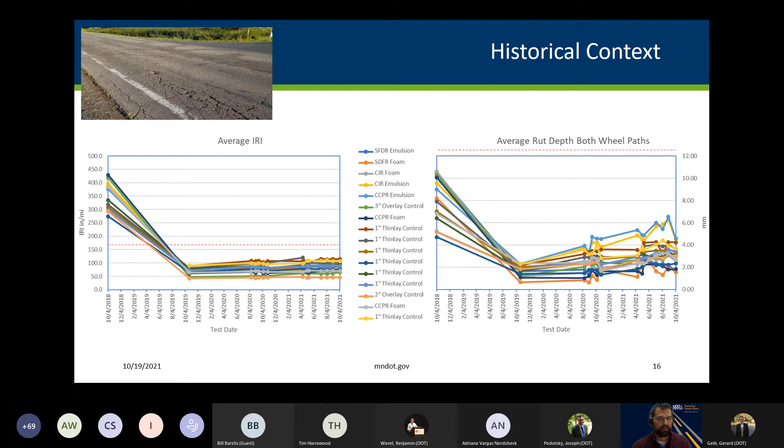For both ride and rutting, the general trends seem to indicate that the road will not be returning to its pre-treatment condition before any planned reconstruction. Everything seems to be going well, and we don't believe that there are any problems headed this way.

Now on to the work that Adriana and Tauhid are doing at NCAT. In an attempt to give engineers more practically usable data sets, they are determining layer coefficients for each of the different treatments. These layer coefficients could be used by future engineers to determine prescribed treatment thicknesses. For this effort, falling weight deflectometer data has been collected from 4 points in each section. This data was used to back calculate layer moduli for the asphalt and base layers.

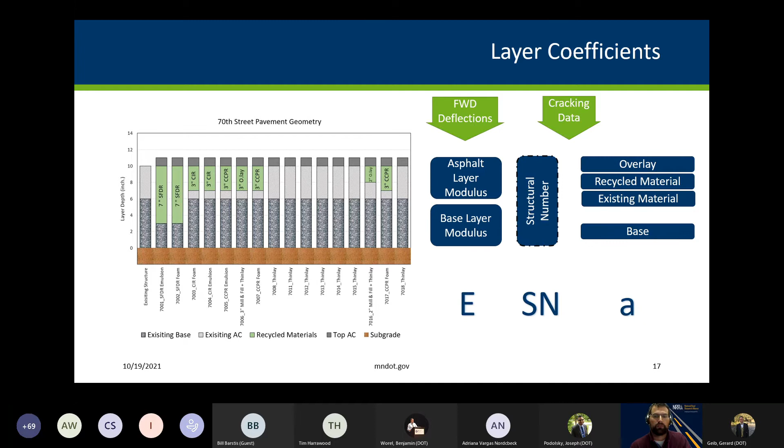These moduli were used to establish a structural number for the pavement. That structural number was then used along with the layer thicknesses and cracking data to develop layer coefficients for the overlay control sections and then for the treatment sections. This process is iterative, with the seed values being calculated, used, and recalculated. As Adriana had mentioned previously, these results are not final, with at least one more iteration planned to tighten up these standard deviations. Currently, most treatment structures compare favorably to the conventional 2-inch and 3-inch overlay.

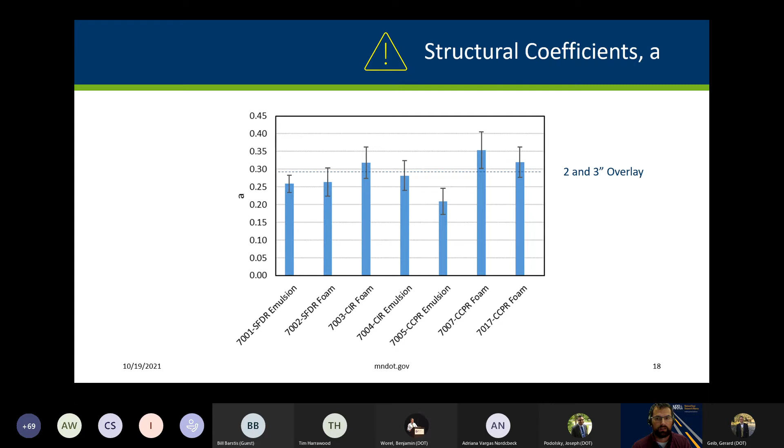So I've shown a straight line for the seed values that were calculated for the 2-inch and 3-inch overlay that were used to then calculate these structural coefficients. But as I said, they are working on these and results may be slightly modified in the future.

All right, so takeaways. With a good mix design and a good paving crew, even just a 1-inch thin overlay or thin lay can make a large difference in the performance of a road. As you can see from this photo here, the road has made a huge performance leap between being scary to ride on to what looks like a really nice road.

Overall, in spite of increased construction traffic, the treatments are performing well and continue to show a vast improvement over the pre-treated roadway. Currently, there are no concerns or indications that the condition of the road will degrade to pre-treatment levels, and we look forward to several more years of data collection. Dr. Vargas and her research team will continue to analyze the data and will continue to find more beneficial ways of presenting the data to future engineers and end users. You should be seeing more of their work being published in the near future.

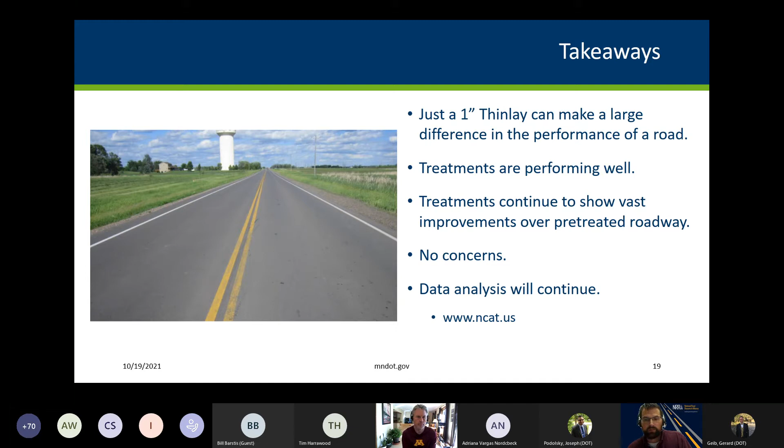And if you would like to see these test sections for yourself, you can just enter MnROAD 70th into the YouTube search bar and you will find drone videos provided to us by MnDOT's aeronautics team. This is a new collaboration for us, and the aeronautics team has agreed to fly over all of our test sections on a yearly basis. So you can see test sections also for 169, CSAH 8, I-94, and our low volume road.

The easiest way to do it is just to go to YouTube, enter MnROAD 70th in the search bar, and it will bring up Albertville 70th Street slides. And coincidentally, Google Earth has also been documenting the progress of 70th Street with photos taken each of the last 3 years. All you have to do is find 70th Street and move the slider that changes their collection dates. And it's a fun way to follow the progress of the road as well as the surrounding construction projects. And this is where you can see the cracks that can be seen from space. You can also see some of the reflection cracks coming back through.

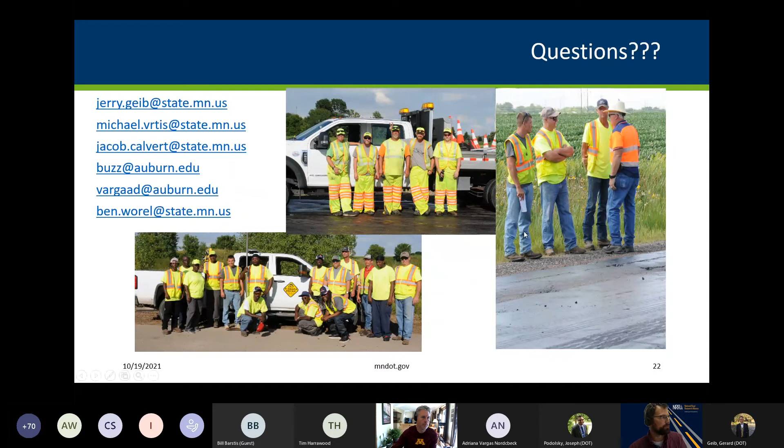Now we can take questions if we've got time. Yeah, thank you. Thank you, Jacob. Very nice. Again, City of Albertville and Otsego got a good deal when they let us use this road for research. It's really improved a lot. And it's a great poster child when it comes to what these types of treatments can do for this type of roadway. Do we have any questions out there?

I don't see any in the chat right now. Quiet group of 80 people. So, all right. Thank you, Jacob. Nice job, and appreciate the effort. All right.

Now I will share my screen and kind of do the summary for the final. I want to talk about kind of the future and the direction that we're wanting to take this, and some ideas on how we could do that. So with that,

are you seeing my screen, everyone? Just to make sure. Yes. All right, thank you.

And I'll be talking about the preservation group. So again, there's a number of efforts that we're doing with NCAT. The preservation, again, is the one we're talking about today. I will talk about the cracking group experiment tomorrow at our next 2-hour seminar that we're having tomorrow at 9 o'clock to 11. If you didn't receive an email, let me know and I'll get that to you. But then we'll be talking about the additive group experiment also tomorrow, and kind of the future in that direction and how that combines with the reflective cracking challenge from NRRA and other efforts in Missouri, and how that's all tying together. So we'll get into that tomorrow.